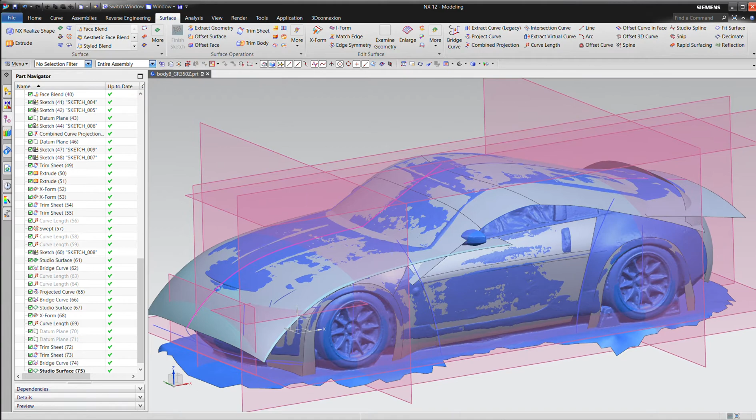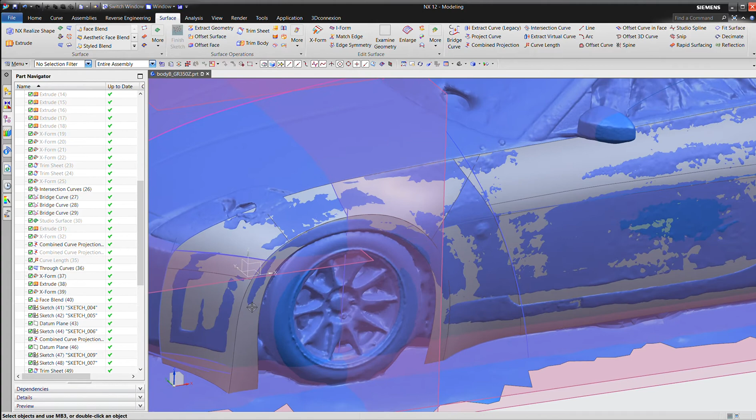So let's get started. Previously we started by tying in a hood, roof, windscreen, and rear deck. Once the top side was done, we added in bumpers, front and rear, and then started work on the sides. In our previous video, we started tying together the front end, and now we're going to work on the trailing side of the front fender.

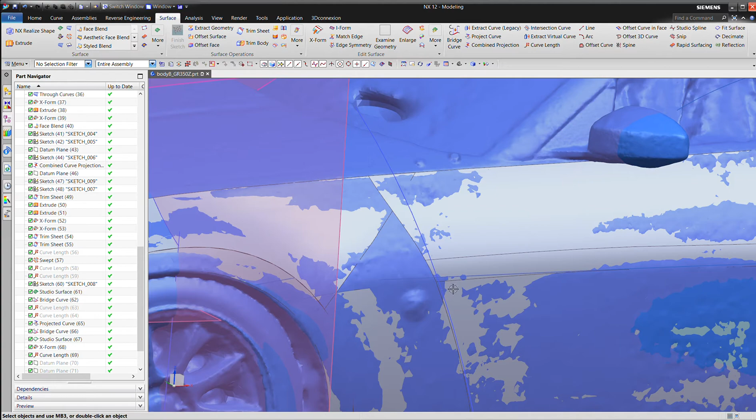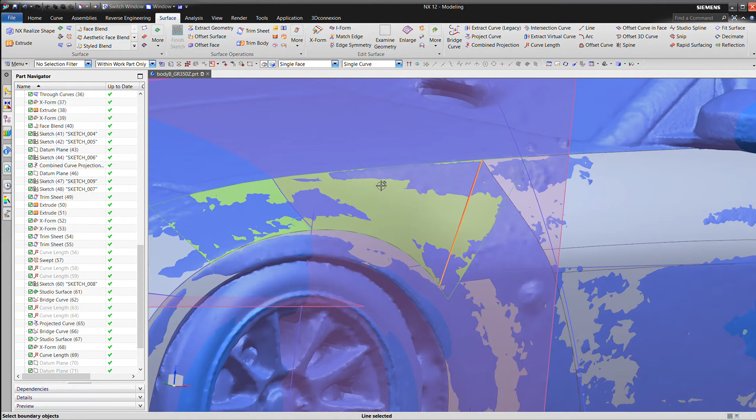So this is a little more difficult because we have a triangle. More importantly, none of the corners of the triangle are consistent. These surfaces just don't match. So the simplest thing we could do is draw a line from corner to corner. Trim the sheet. But that still doesn't fix the alignment issue. So let's get rid of that.

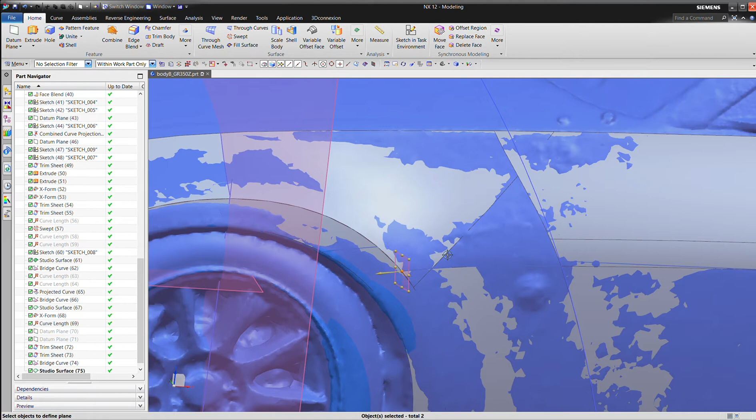Next, put a plane here. Trim our sheet. Now we have a four-sided surface.

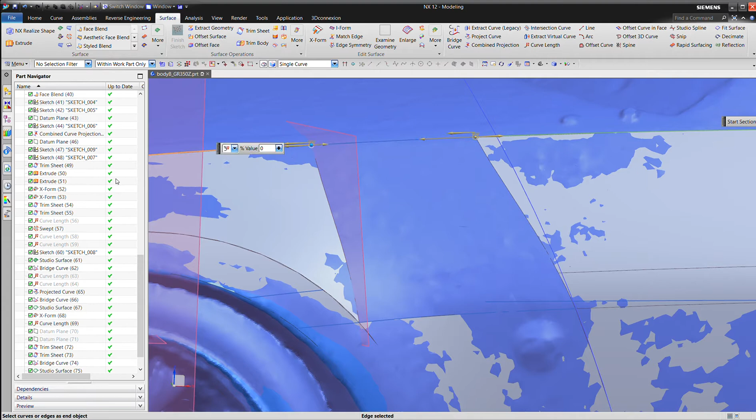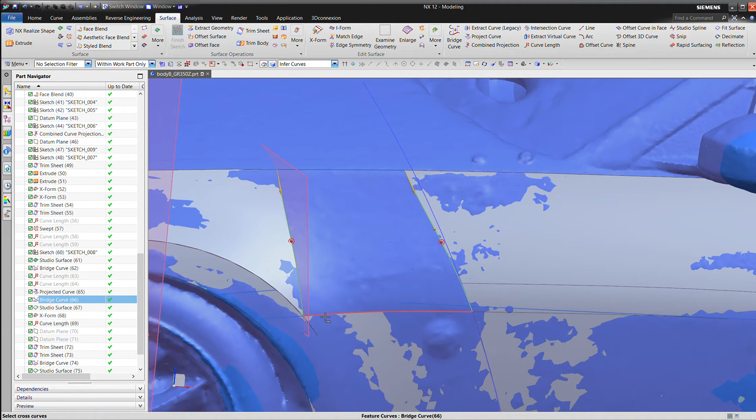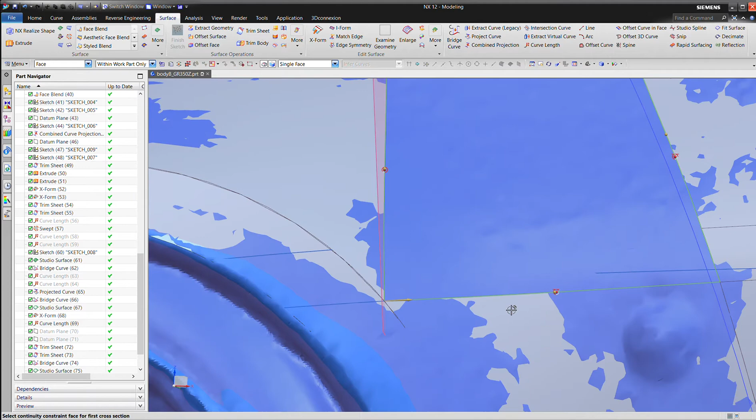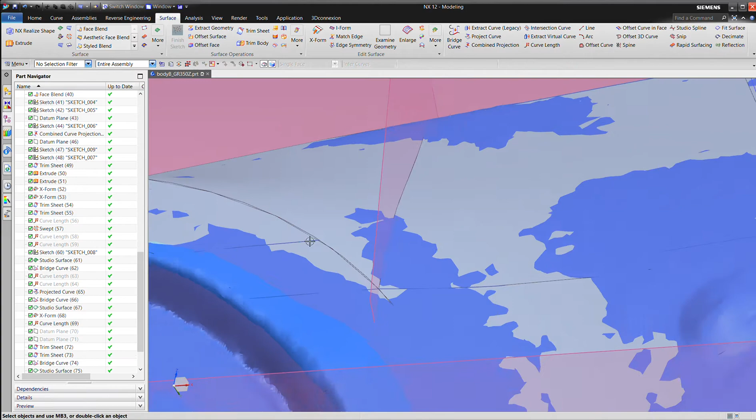Let's go ahead and get a bridge curve up here. But there are some problems with this. It works, but as soon as we try and make it tangent, it doesn't like it. Because this corner does not agree. In other words, this curve does not leave that corner tangent to this surface. So that's just not going to work. Now the result is we end up with a crease in the surface. Even if we get rid of all these lines, we can see that surface just doesn't quite jive with its partner.

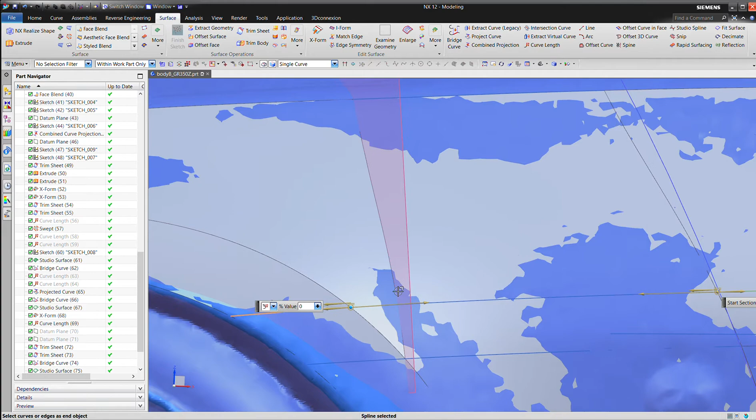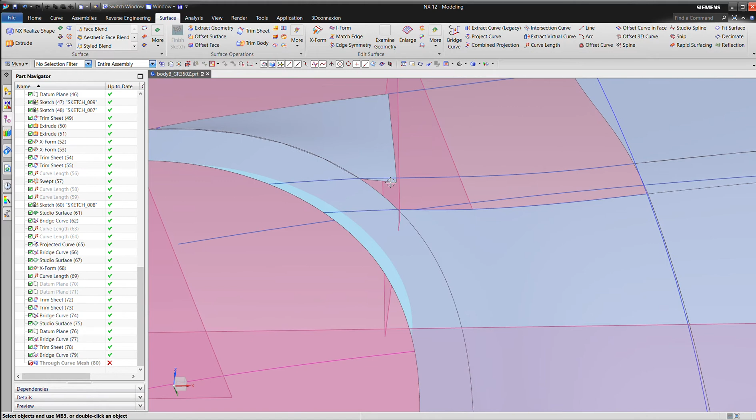So how do we fix that? Well, actually not that hard. Let's trim the sheet a little further. And now we've got this floating corner here, and that floating corner is something we can work with. Let's hide this so it doesn't get in our way.

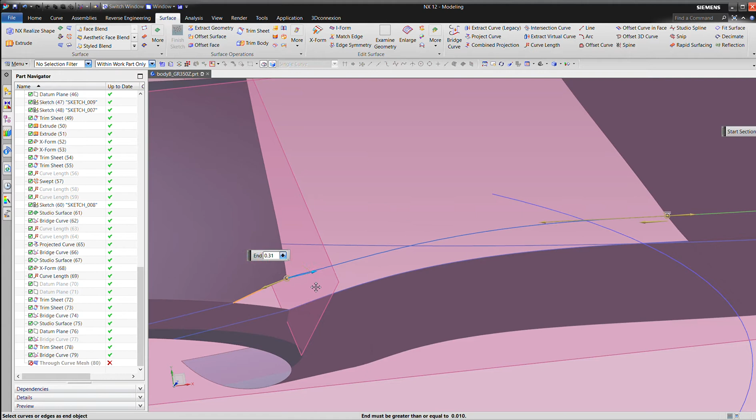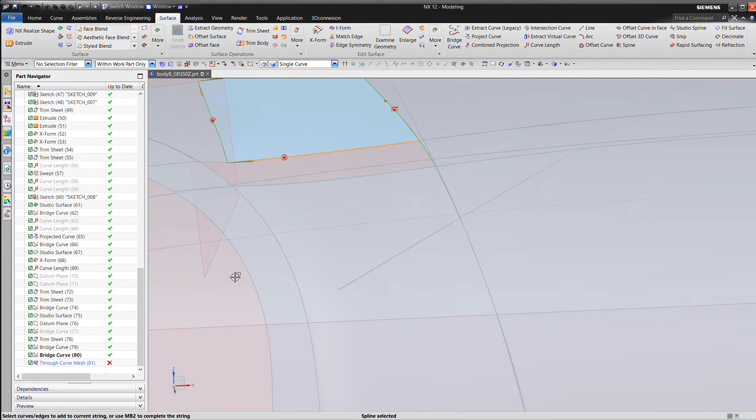Might have to go down to G1 on that to make it happy. That's okay. Now let's try this again. We're going to replace this guide with that one. And now we can have tangency over it. Sorry, that needs to be G1 on both ends. Now we have tangency on both ends. A little aggressive on the curve.

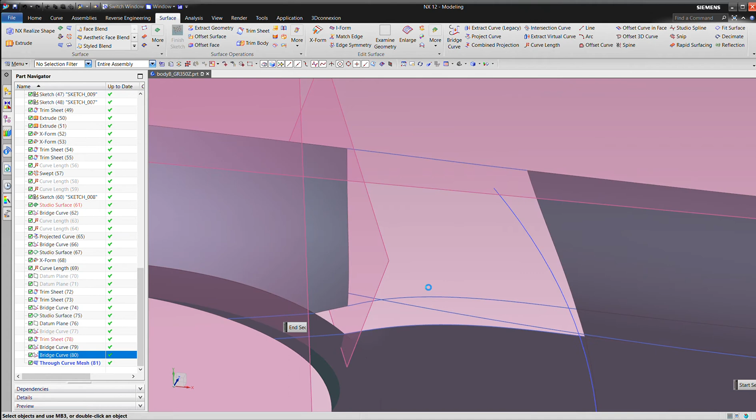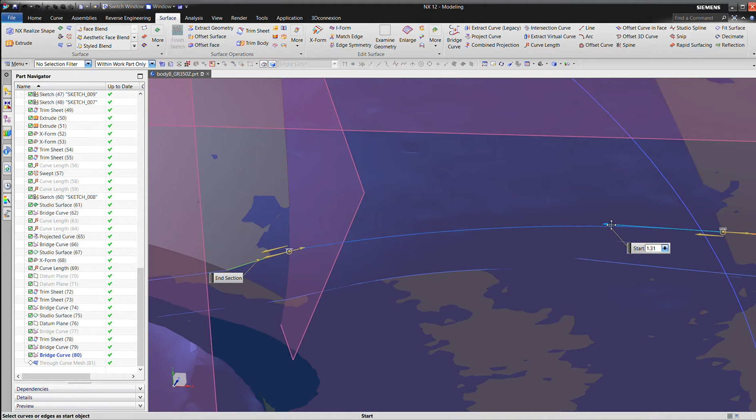Let's tune that up a little. Let's bring back our STL so we can trace a little more. For the most part, we can just eyeball this. Yeah, not bad, not bad. And now we end up with a nice little rectangle that we can patch in pretty easily.

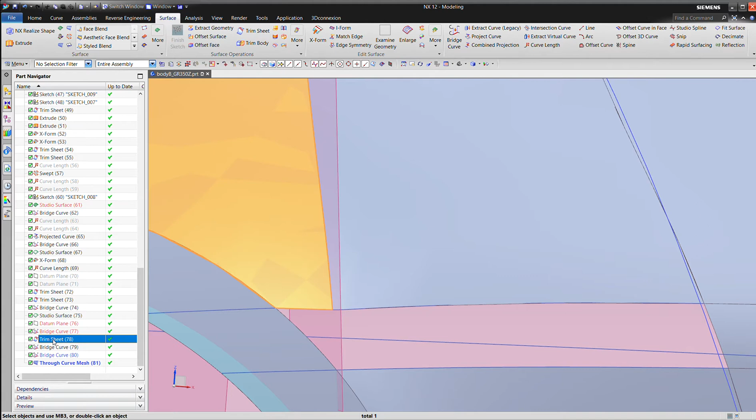Oh, I know why that doesn't look right. We trim the sheet normal to face. If we trim it along Y, that'll put it on a better plane.

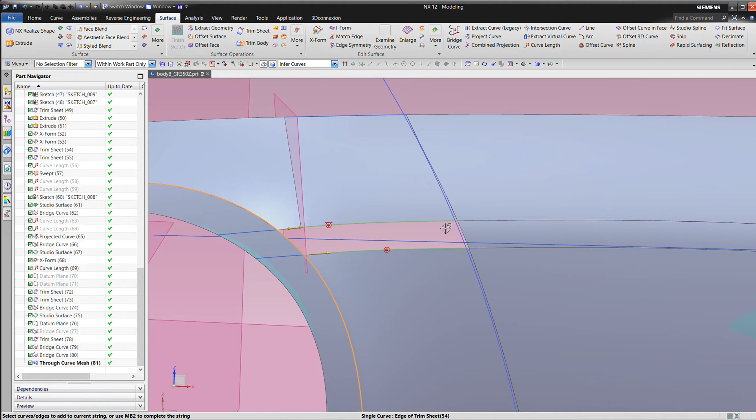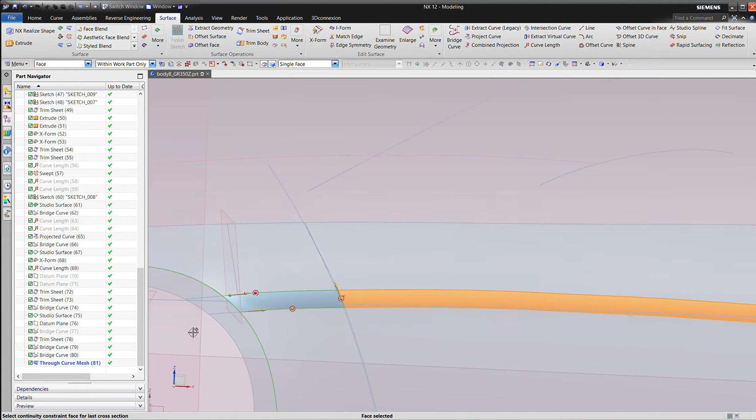So we'll patch this in, and if we're lucky, we should be able to get tangency all the way around. Well, we're not going to get any tangency, are we? Well, we get tangency there anyway. Oh, that's why, I selected the wrong side. There we go. Now we get tangency on 3 sides, and we have a hard surface on the other anyway.

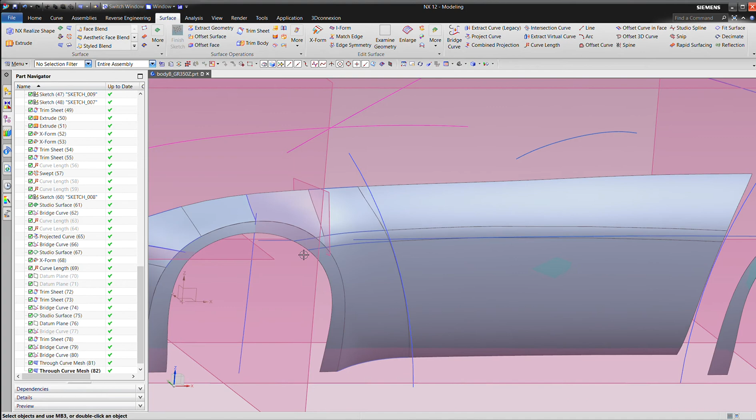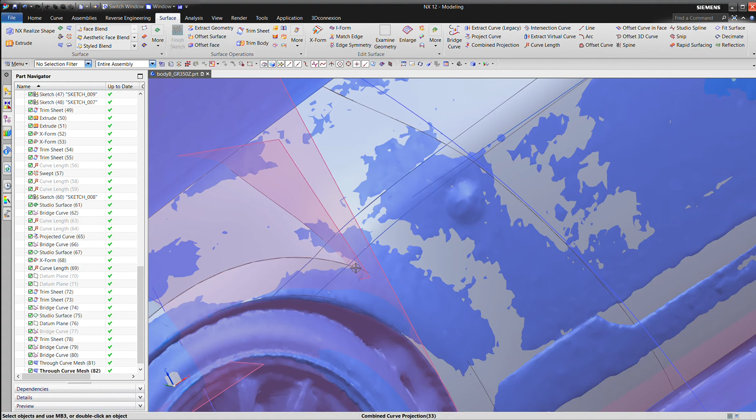How does it match? Good enough. Now this is a fairly sharp highlight line that we're trying to blend out into a large surface. In reality, this starts to grow, so we should probably lengthen this little patch or spread it out. But again, for now, we're getting pretty close.

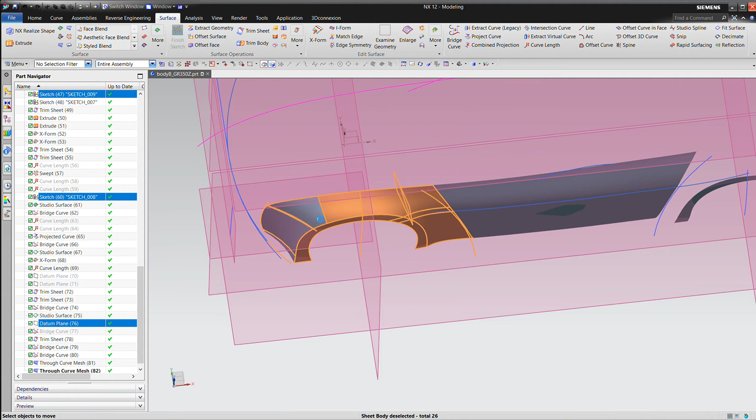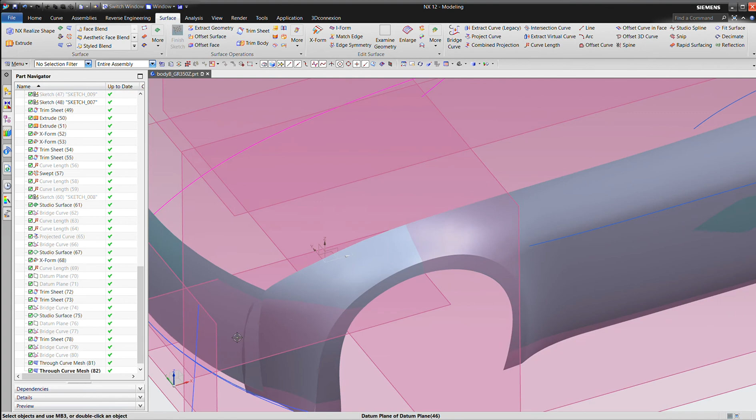Now we have an entire front fender. And if we hide everything, all our construction, we can see what we're working with. Let's turn the front bumper back on. We should be able to blend that in pretty easily, but again, we've got to get our headlight carved out first. It's starting to look a little bit like a car.

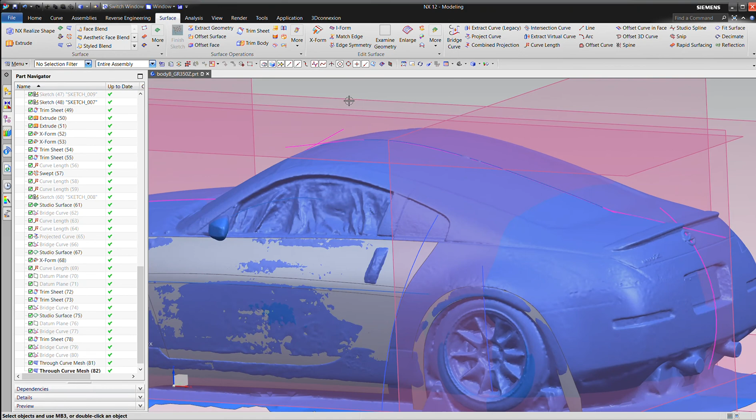And in the next video, we'll carry on with the back, much the same as the front, just a little bit of different constraints. Mostly we're going to be trying to work it into the bumper directly because that's such a broad radius there, and that radius flows into the roof. See you next time.